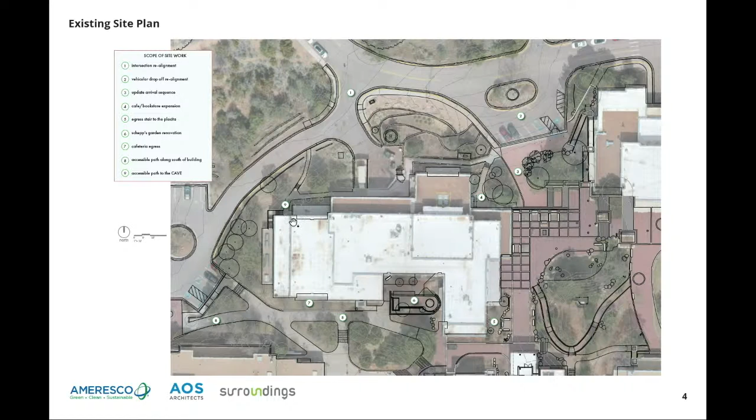That'll happen before the National Register nomination. A lot of accessibility improvements have been made. You all are familiar with that part of the city. It's very hilly, so accessibility is a really important thing we need to do. We're adding a stair here, I'll talk about that in a minute. There's a garden here on the south side that wasn't built until the 1990s. It is not accessible - I don't know how that happened, because ADA was certainly in effect at that time. And then all of these walkways here are inaccessible. We will be making some accessibility improvements in the landscape to this part, to this door, which is a room called The Cave, which is kind of an undergraduate hangout space.

And yeah, so here this says existing site plan - that was a mistake, I apologize. This is a proposed site plan. This is, again, very preliminary. I just wanted to point a few things out to you this evening.

Here we see the reconfiguration of the roads. The red lines indicate where the current curb cuts are. We're going to be lowering a portion of this drive about 16 inches in order to achieve accessibility. And we'd like to reconfigure this staircase up into the campus so that it points to the entrance, so that people know where the entrance to the campus is.

We are proposing a bookstore addition here that I'll talk about in a little bit. This is the stair. Here is the reconfigured garden that will provide accessibility and maintain the place as an outdoor classroom.

We do need to make a series of small modifications to the landscape and the building. I'm not going to go into it tonight because I know we're going to come back, but there's a series of funny life safety egress things that we need to resolve. So this is actually a new stair that we need to add. It really won't impact the aesthetics of the building, but we'll be telling you more about that later. A new series of handicap accessible ramps here, providing access to that cave.

Importantly, what we haven't yet explored but are looking into now is this number 10 here - we are adding air conditioning to the building. It is currently not air conditioned, and the college is doing more and more summer programming. The building is really far too hot in the summer to do that, so we do need to add air conditioning. We do not want to put a ginormous chiller on the roof, but we have to put it somewhere. We've done a fair bit of analysis, and this is the best location that we can come up with.

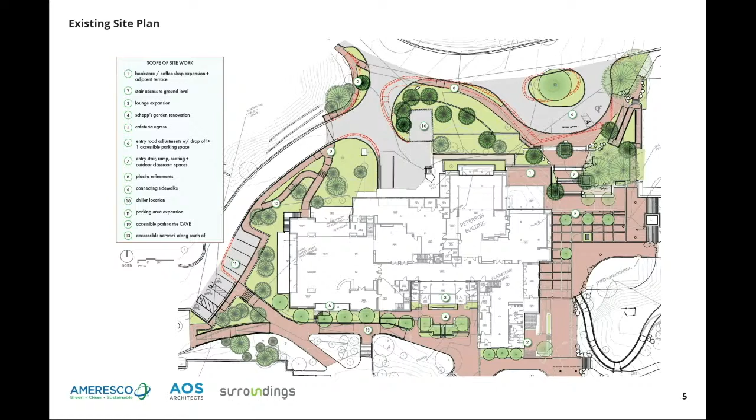Tonight I really want to focus on the buildings. I'm going to skip through some of these plans. We can come back to them if there's need. This is the existing first floor plan.

I wanted to jump to this to talk about some of the interior features of the first floor. I've recognized that you have no jurisdiction of the interior. We're in a bit of a pinch here because we're really trying to conserve and preserve a highly significant interior by Alexander Girard. In the National Register nomination, it specifically says this building is significant because of its interior and because of the work of Alexander Girard. So we're trying to accommodate the necessary programmatic changes, preserve the Girard interior, and resolve critical life safety issues, as I mentioned. So let me point out a few things.

This blue line, where's my cursor? Here's the Girard mural. It's 140 feet long down the main corridor. We see bits of it here in this photograph. It's a magnificent work of art.

And there are painted doors I referenced before. You see this red photograph here. This really playful, wonderful, many, many colors throughout the building. We're working with Stephen Prinz, renowned local mural conservator, who will be working on the mural and the doors.

Inside the building, between the bookstore and the coffee shop, we keep calling it the Wiggly Wall, but it's this kind of stepped wall that's indicated in pink here in this drawing. We see this photograph - I apologize how small the images are - but it's this kind of stepped wall with chalkboards, really important part of Girard's legacy in the building.

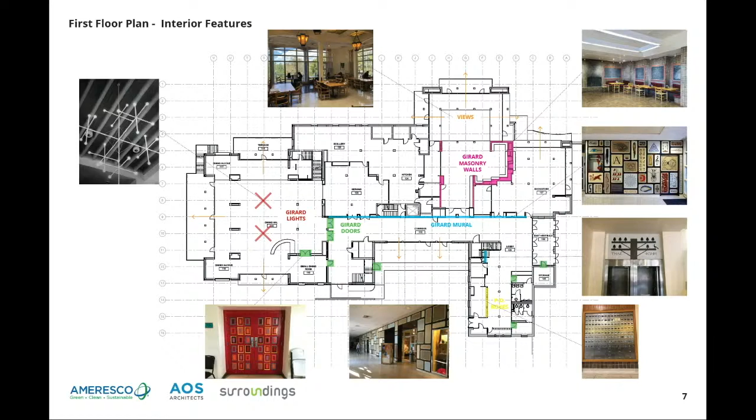And so that's part of why we've kind of ended up towards this addition. I'll talk more about it. We're also looking at the incredible views out of the building, and from various places, and trying to balance preservation of the building with life safety, which has to trump everything that we do, and then the programmatic needs.

The first floor proposed - this is preliminary. As we mentioned, we're looking at 3 additions that are shown in with these red outlines. I'll talk about the bookstore addition first.

As I mentioned, we're really aiming to - I think it's really important to hang on to this really curious wiggly wall. Can I just close all this stuff out? So what we've come up with as a solution is to create a 775 square foot plus or minus addition here that represents about a 40% growth of the bookstore, which will make it economically resilient.

Right now they're really struggling to break even in the bookstore. They really need that extra space. By doing that, we're able to then create an opening between the coffee shop and the bookstore here, and we're going to penetrate this wall here. We're working on the designs of that, but that is really allowing us to preserve this key aspect of the Girard interior.

The second addition is what we're calling the East Entry addition. This will make much more sense when I show you the second floor plan, so I'm going to postpone that discussion. The third addition we're calling the South Court addition, and serves a number of purposes.

Interestingly enough, the Student Center has no lounge space. There's no comfortable space for students to relax and talk with each other about their days and everything that's going on. There are lounges on the campus, but they're all in the dormitories.

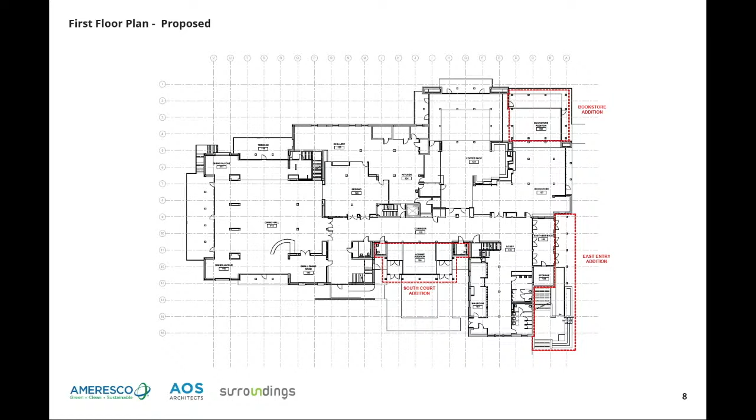We are sprinklering the building as part of our upgrade, but that doesn't buy us enough extra leniency in terms of the additions. The other thing to take note of with this stair is that there are a series on the north side of very large terraces, which provide space for these large meeting rooms in the Great Hall. Those terraces also do not have appropriate egress, so we're connecting them all and linking them through to this slight expansion of the east terrace, and then that will access this stair. Again, that will make more sense in 3 dimensions.

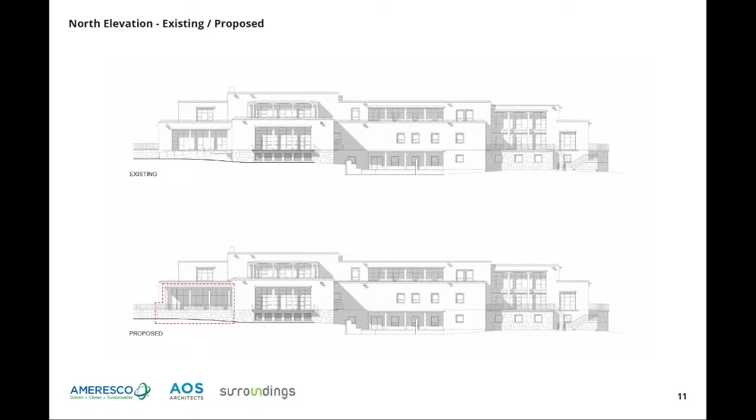Trying to go quick—we've included the existing and proposed elevations for each facade, and we are not changing the proportion of stucco to glass on the building. We are simply moving glass out away from the building to preserve views and provide these programmatic expansions. So when you look at the existing versus proposed, they don't look all that different, and we think that's a good thing. That helps us meet the Santa Fe Design Code as well.

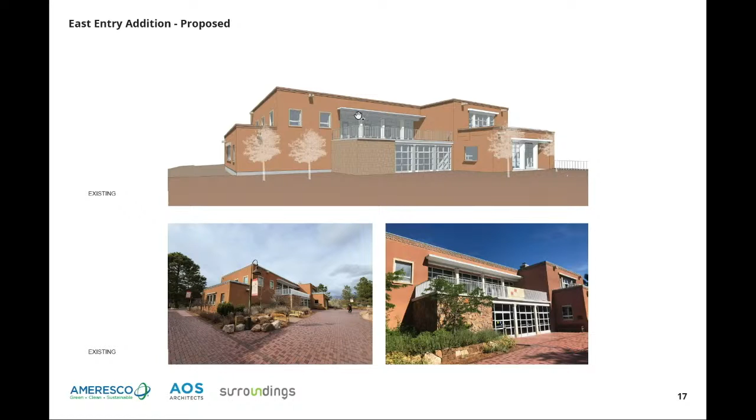Here we see some more recent photographs, early 2000s, where this portion of the building really wasn't experienced from the main plaza. We can see here this earthwork happening and the connection that was removed that has caused this life safety problem. Here we have our early computer model on the top, and you can see now this landscape is all at one level, whereas before it was tiered. We have a lot of people that need to egress off of this deck that we need to get safely out of the building.

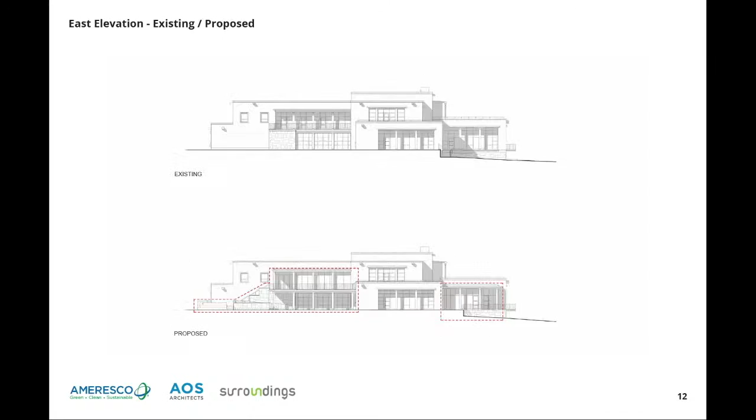One of the first things that we did—we also have an accessibility challenge that I forgot to go through in the plans. Given that the building was built in 1964, and obviously ADA was enacted in 1990, there is a plywood ramp that's really hastily constructed here. There's about a 2-foot difference between this portion of the building and this portion of the building. That ramp is too steep, it doesn't meet ADA, it looks terrible, and it's an intrusion into this remarkable historic interior.

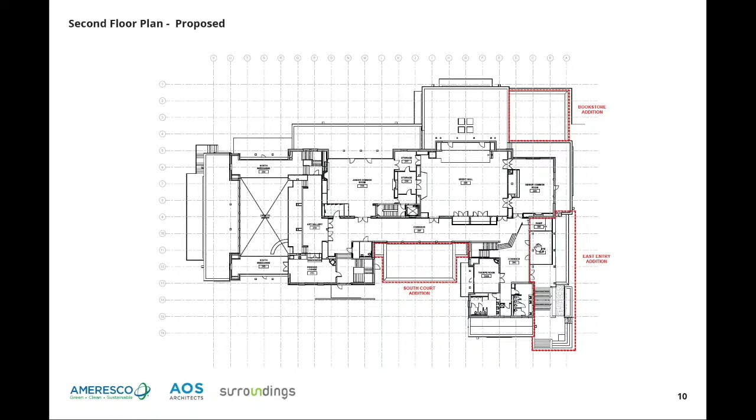So what we're proposing to do is actually take that ramp and move it outside onto the terrace. So there's a ramp here, and there's a small lounge addition here as well, built onto the existing deck. That'll make more sense in the three-dimensional.

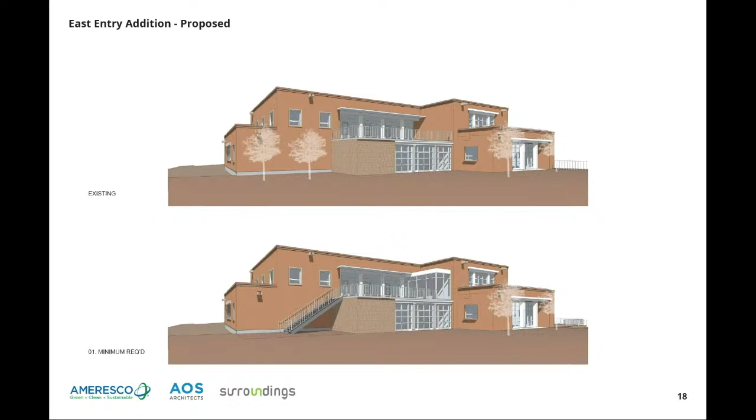At a minimum, what we need to do is add a stair from grade up onto this masonry cube, this stone construction, and we need a ramp addition. In my mind, these are both kind of carbuncles. We've got a really extraordinary historic building, and we're trying to add on to it, solve life safety problems, while not taking away from the building. In my mind, these absolutely do that.

We did have a cursory courtesy review with the State Historic Preservation Office last week, and they've given us some really wonderful feedback. Their concern is about the monumentality of this, and they would really like us to diffuse the prominence of the second floor portal, which is set back.

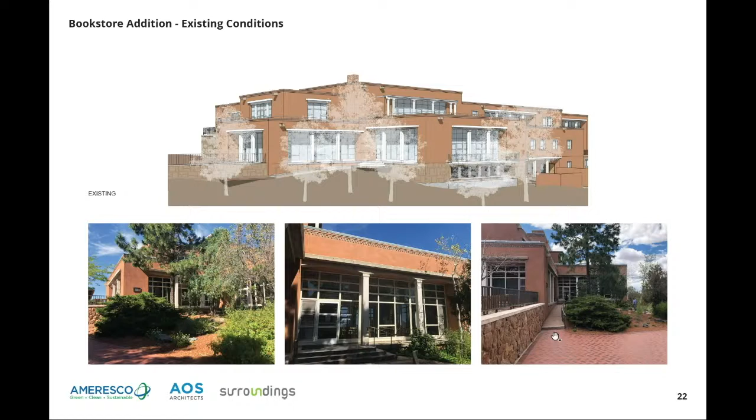Here's the existing view of where the bookstore addition is happening, and we have these kind of wispy trees we're looking through because the campus is highly vegetated. So these additions, seen here in computer drawings, will largely be screened by vegetation. Here are some existing views - there's curious ramps with steps, and we're trying to improve accessibility.

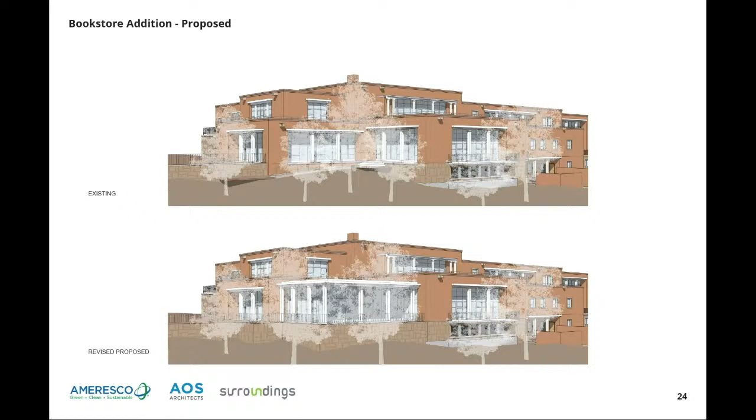The last addition is the South Court addition. Here we have this very broad south-facing glass wall with no protection from the sun. At times of the year, particularly in the winter, we get a lot of direct light through that glass onto the mural.

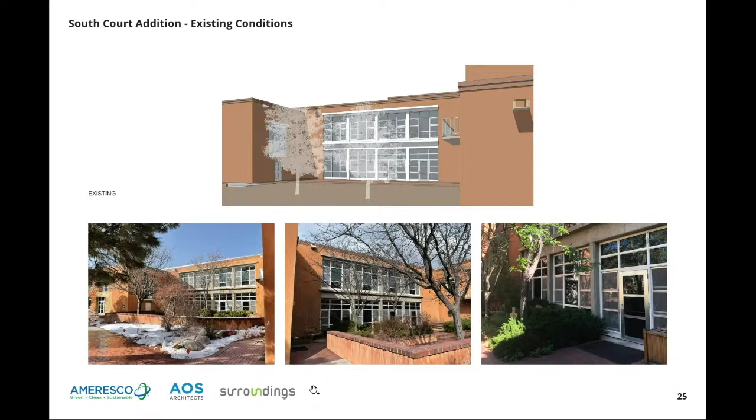So that is what we're hoping to do, and I hope I've explained the necessity of this. I'm happy to receive your feedback and hear your thoughts.

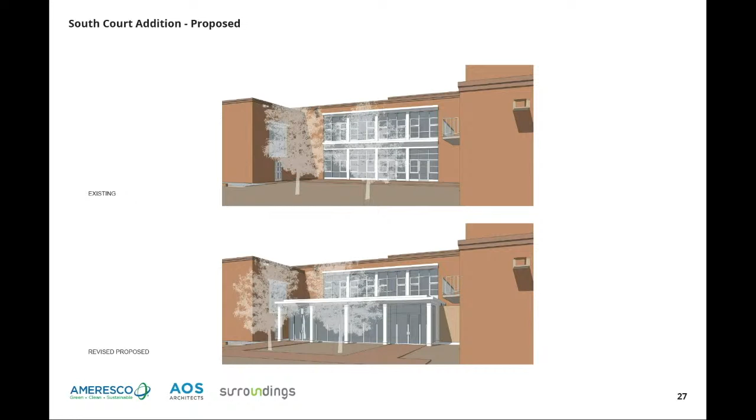What I think we need to do is take one elevation at a time, so the board can thoroughly look at it and digest what is happening in each, and then we will give our comments. The elevations you are making changes to are the north, south, and east. We'll start with whichever one you'd like - let's start with the east.

What is the total square footage that you are adding with the stair? The building right now consists of 45,000 plus square feet, and you are proposing - the bookstore is about 775 square feet, this east entrance is about 422 square feet, and these are enclosed heated areas. This is all in the memo that's in your packet. The South Court addition is 990 square feet.

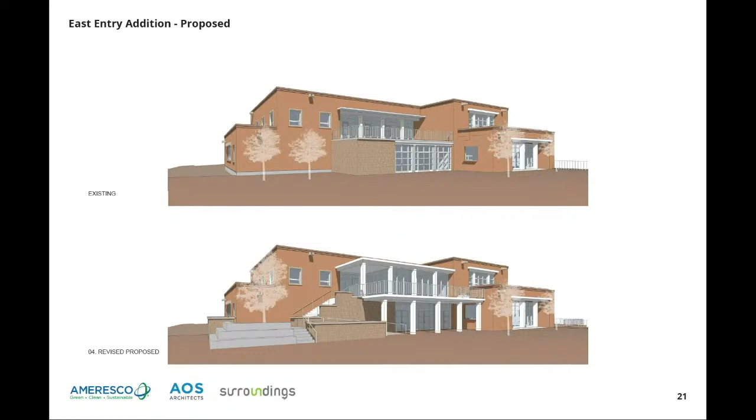Yes, Heather. Thank you, Chair Rios. I would just like to point out that the Historic Districts Review Board actually visited the site today as part of their typical field trip, so we got the opportunity to walk around not only the exterior, but also the interior.

Wonderful, thank you for letting me know that. So, board members? Yes, Member Larson.

Yeah, so I am really appreciative of your presentation, thank you so much. I'm really happy that we have robust documentation for this property, and it helps us make our decisions as well.

And clearly you've put a lot of thought into this building, which we may not have seen 10, 15, 20 years ago. This might have just been dismissed as insignificant architecturally. So it's really nice to see it being honored by the proposed additions, and also really enlightening to see the consideration that the exterior is giving to the interior.

Which, of course, is contributing to its association with Alexander Girard and his design. I really appreciate that we're thinking holistically about the property, so I think we should all consider that in our feedback as well, with the need to protect the interior and enhance it.

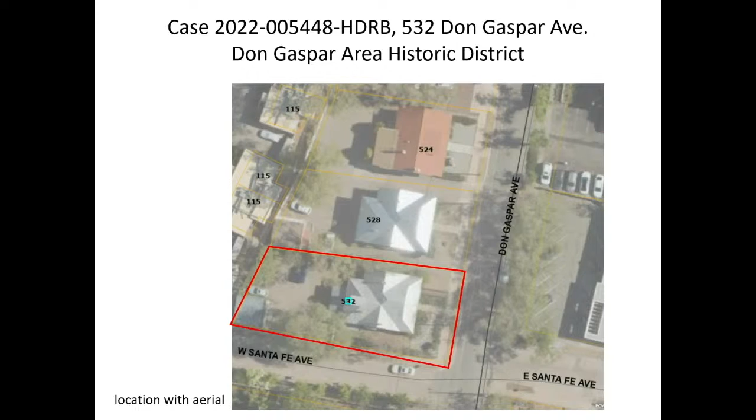For the new board members, I think this is the first time they'll be seeing this tonight. In the past, we have seen this come forward for a status review earlier this year, and then recently, about a month ago, the board asked for changes and more detail. So tonight I'll do a quick review of the plans and the building itself. Just a little background: we are looking at the twin, as we like to call it, 532 Don Gaspar.

So we are in the Don Gaspar Area Historic District, looking at the Craftsman Bungalow that's been listed. It was originally listed as contributing to the downtown and east side. The board reviewed it to do a status review and designate it as significant earlier this year. It was built in 1928 as Tyler's Drugstore, so it was used not as a residence but as a commercial building.

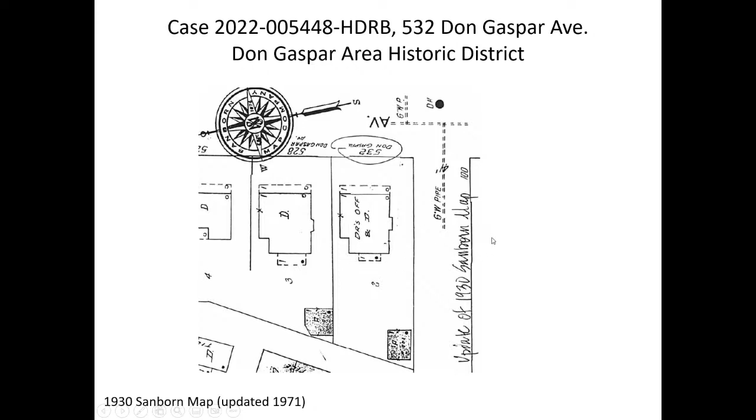That ramp will be removed as part of this application.

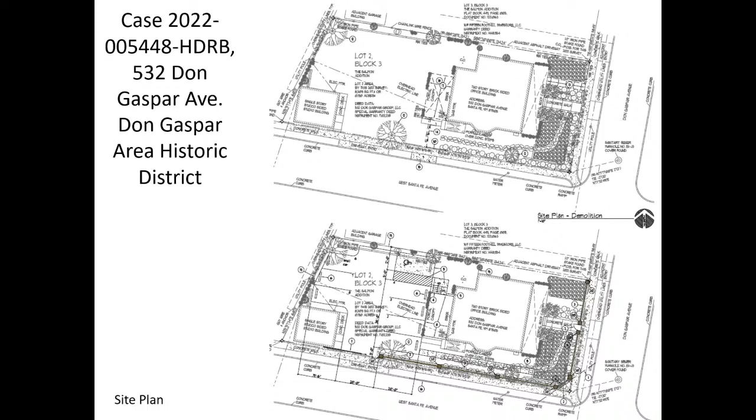I'm going to direct your attention to the site plans where there is the addition of a yard wall. That wasn't very clearly shown in the last hearing we saw this come forward, but you'll see it starts in the northeast corner and wraps around to where the parking stalls end. So part of this proposal is a yard wall. The twin does not have one, and this is a stucco yard wall with brick detailing, brick pilasters, and a wrought iron gate. It is about 4 feet tall.

Let's get through these. On the north facade, we are also seeing the change of windows - all the non-historic windows will be replaced. There was a window assessment, and the exception was removed from this case because the proposal is to replace all of the damaged windows that are considered beyond repair. So once we are looking at beyond repair, they are not looking at replacing any that are within repair, so there's no exception applied for that.

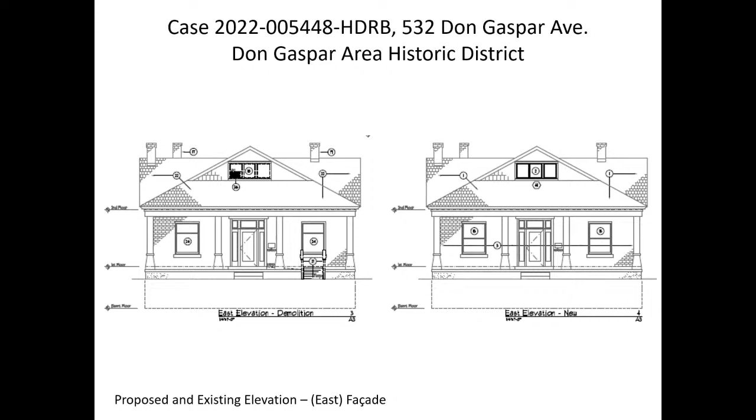So you can see in the dashed lines which windows are going to be replaced. That ADA access ramp will be removed, and there will be a lift added in the back. From the last time we saw this case, there have been some slight updates and changes based on the details that we were really looking for, or rather the board was looking for.

So this is the back porch detail, and this did require an exception. We believe staff recommends that all the exception criteria were met, but you may require some further testimony rather.

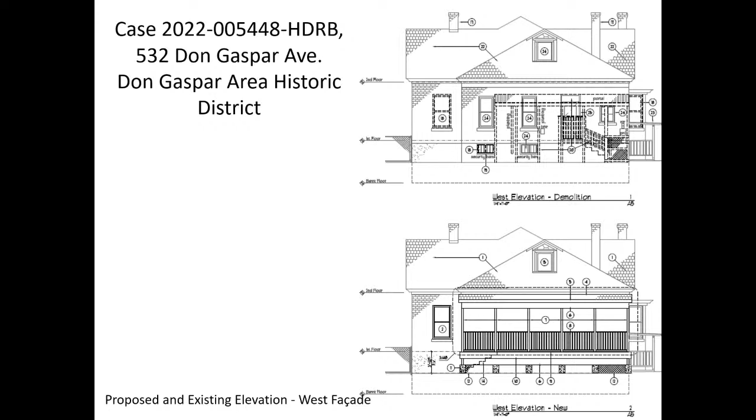One of the board's comments last time was to space these vertical posts, these columns, out a little further because they were very tight and did not fit the building's proportionality very well. Another comment was to come back and add details so it can be further examined what this back porch is really going to look like. That has been added - there's been an increase of about 6 inches of the overhang of the porch and post, and it's been pulled back a little bit more in with the house.

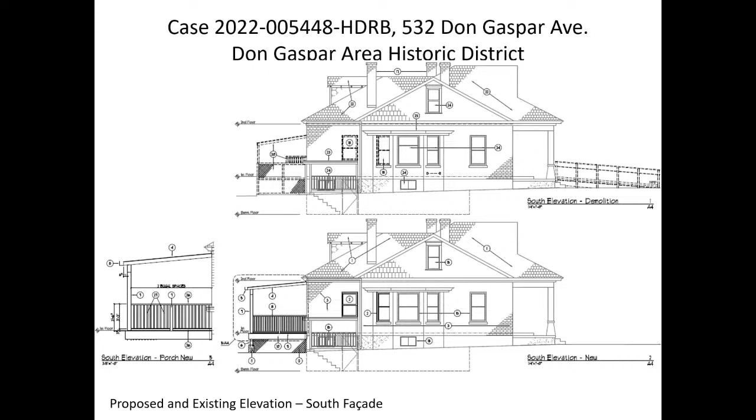Now all of the railings are wood and to be painted. We also have details for the replacement of the roof. The roof has been found to be pretty heavily damaged, roof decking rotted - you'll see that in your packet.

Here's a blow-up of the details that we're looking at tonight. I still have an added condition on this one, just that the wrought iron remain the color of wrought iron, not to be painted to match the stucco.

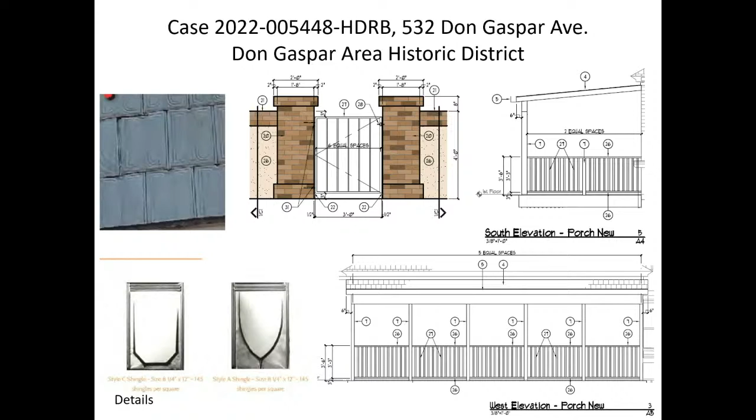Thank you, Carly. Any clarification questions for Carly at this time? Member Beachley: Could you please remind us, is the exception requested for the replacement of the porch, but not for the roof?

Not for the roof. So whenever we are replacing materials, the way the code reads is that replacement of historic materials that are repairable requires assessments from someone who can go look at the windows and give a really good assessment of the dry rot we're going to see. Same thing with the roof. That's why they're coming back. If it's repairable, we go as tightly in kind as we possibly can. Now, if it's not in kind, that's when an exception is requested.

Is this considered in kind, in your opinion? I think this is as close as we can find from any manufacturer at this point. So if there's none on the market that we can really get, this meets that definition. Thank you. Any other questions at this time?

If not, will the applicant or applicants come forward and get sworn in? You swear under penalty of perjury that the testimony you're about to give is the truth, the whole truth, and nothing but the truth? Thank you. Please state your name and address for the record.

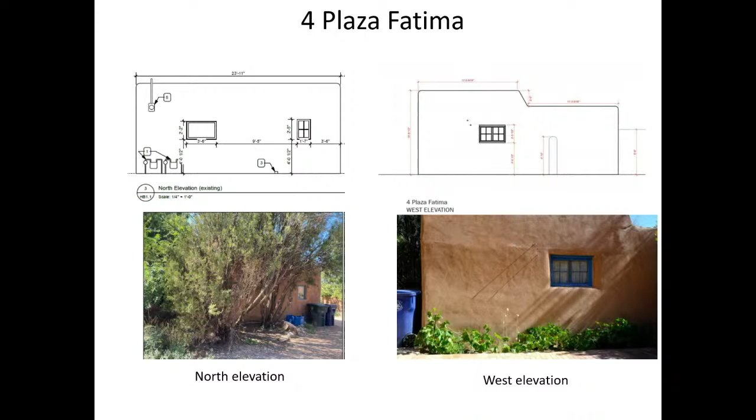The house's entrance features a multi-light French door behind a decorative wood screen. The front door opening extends to a front 4-panel wood casement within the same opening.

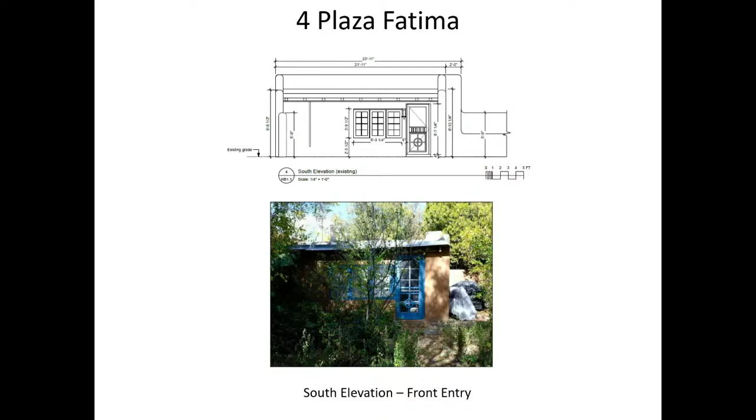There have been no major exterior alterations to the building. It has remained unchanged since the 1950s when the current owners bought it. The south elevation's combined window and door, and the east elevation's single 4-panel multi-light wood casements, which are behind the tree on the lower right photograph, help to define the simple vernacular character of the house.

The 6 foot stucco yard wall, shown in the lower left photograph, extends across the east elevation and closes the backyard courtyard. The wall is believed to have been constructed after 1984, which is when the Historic Building Survey was written. At 6 feet, it is highly unlikely that it was built before 1972 or '73.

Other yard walls of varying heights in the plaza compound were added since the 1980s, based on surveys of the other 4 casitas in the Plaza Fatima compound. The applicant requests historic status review and primary facade designation as applicable.

Staff recommends the historic status of the structure be maintained as contributing per 14-5.2C, designation of significant and contributing structures, and that the east and south facades, respectively 1 and 2, be designated primary facades. Staff recommends that the yard wall be designated non-contributing based on its tall height and age. And that concludes my report. I stand for questions.

He's already been sworn in. Oh, thank you. And I will indicate that we cannot discuss possible future plans. We are simply wanting, this is a designation, a historic designation and primary facades.

And, yes, sir. We are, I heard what you said, Madam Chair, and I won't delve into details. The intent of this renovation that we'll be proposing, that you'll be hearing in the future, is not to change the massing or the area of the building. It's to breathe new life into it, to make it more livable. It's essentially falling apart. There's vines growing through the inside of it.

Some of the windows, we love this old building. Our client loves it. His family's owned it since the 1950s. They intend to continue to use it. We want to make it more functional. Our intention is not to change it in any significant way.

We've been led to believe, and there's been communication, that the owner, prior to engaging us, did have a meeting with David Rasch related to a designation. David had indicated that the portions of the building facing the public way, primarily the north facade, was the contributing facade. The entire development is one of those wonderful schemes in Santa Fe where there's public access, there's a driveway, and then everyone's private spaces are in the back, and there's a public face to the building. I'm adding this not to contest anything that Angela's presenting, just to present some of the history related to this project with the owner.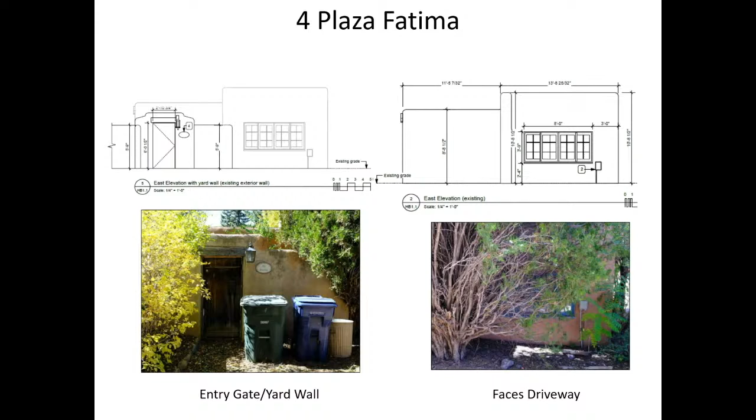There's no information on the exact date, so would you accept the possibility, or the probability, that the wall is in fact historic and could be designated contributing? Yes, I do, in absence of definitive history on it.

I'll make a motion. In case 2022-005792, HDRB for Plaza Fatima, based on staff's report and the information presented today in the record, I would move that the building's status be maintained as contributing, and that the east and south facades 1 and 2 be designated primary, and that the yard wall be designated contributing as well.

We hear a second. Aguilar Medrano seconds. Anything further?

Roll call vote, please. Member Aguilar Medrano? Yes. Member Berkeley? Yes. Member Biedscheid? Yes. Member Bienvenu? Yes. Member Larson? Yes. The motion has been approved.

Thank you very much, sir. And we move on to the next case, located at 906.5 Don Miguel Place. May we hear that report, please? Yes, and that's yours too, Angela.

Thank you, Chair. This is case number 2022-005793, a remodel and addition proposed at 906.5 Don Miguel Place. The place is off of Camino Don Miguel.

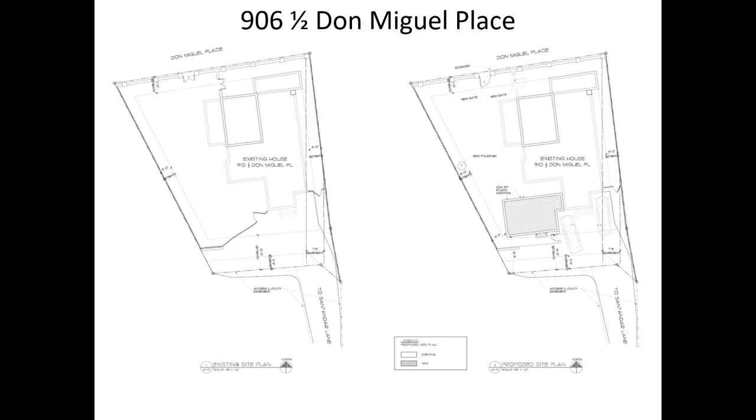So this is the site plan, existing and proposed. This house is a single-family residence constructed in 1951, designated non-contributing to the downtown and east side historic district. The house is single-story, flat-roofed, with parapets in the Spanish Pueblo Revival style.

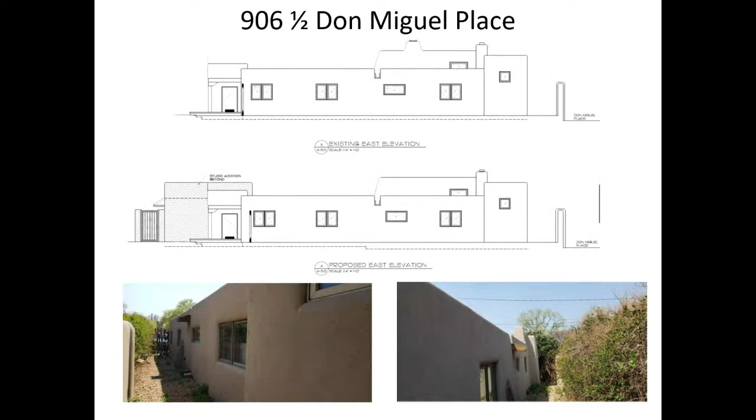It was extensively remodeled in the 1970s, when all the windows and doors were replaced and clerestory windows were added. You can see the clerestory windows in the existing south elevation at the top of this slide. An addition was added in 1998. The residents access the front door from Santander Lane.

No, it is Santander, not V Hill, which we discussed on a field trip today—to correct that. The applicant proposes to add a 404 square foot studio to the southwest elevation at the same height as the house, which is 13 feet 6 inches.

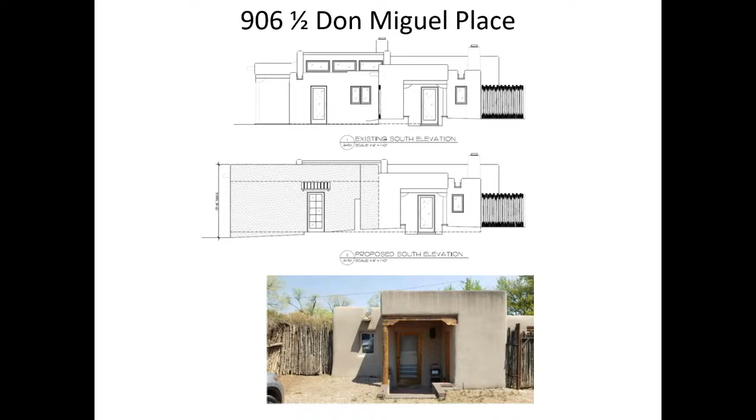The south elevation will have a 2x5 light French door and a small 10x10 overhang with a metal roof, burnished slate. The west elevation will be 2x3 light. New windows will be aluminum clad wood, and stucco will match the existing, which is buckskin.

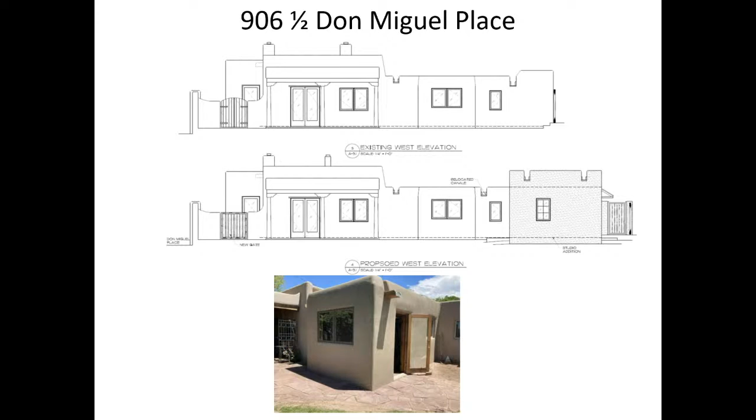The new gate would be rusted metal with a wood frame stained dark brown. The applicant is proposing that to discuss with the board tonight, and it remains part of his proposal.

The applicant also proposes to replace the existing low wooden arched gate on the inner courtyard, behind the same yard wall depicted, on the east side of that wall, with a new gate to match the proposed gate on the north elevation. That gate is within the courtyard, inside, behind the wall.

Approval of the proposed project with the condition that the sliding glass doors are divided light if found to be publicly visible, and finds that the application complies with section 14-5.2D, the general design standards for all historic districts, and 14-5.2E, the downtown and east side design standards.

And with that, I stand for questions. Any questions for Angela, board members? It appears not. Angela, may we have the applicant or applicants get sworn in?

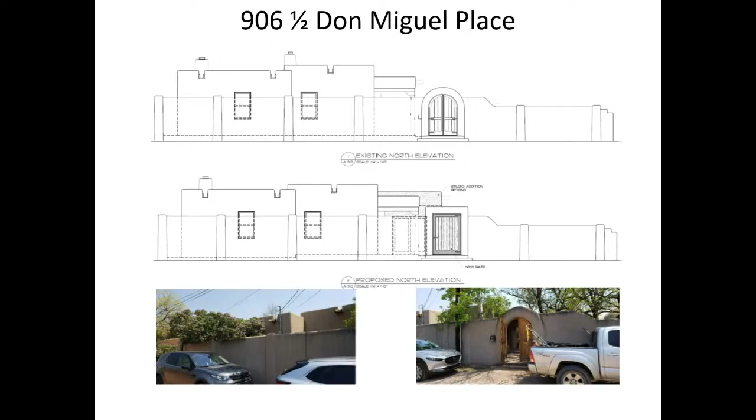You swear under penalty of perjury that the testimony you're about to give is the truth, the whole truth, and nothing but the truth? I will, I do, yes. Thank you. State your name and address for the record.

Richard Martinez, Martinez Architecture Studio, P.O. Box 925, Santa Fe, New Mexico. Hi, Richard. What do you have to tell us about this project?

A couple of things. We don't intend to affect the house in any way. What we'd like to do is add a studio for the owner, who is an artist and has a studio in her house right now. She's owned this house but lives nearby, and she's going to move back into this house, which is very nice. So we're just adding a small, basically 400 square foot addition as a studio for her.

It's so small that the one swinging door has to open out so we can fit all the furniture into the space. And the sliding glass door doesn't have any dividers because the windows and doors on the house don't have any dividers. I was trying to not make it stand out in that little courtyard. But otherwise, the doors and windows on the outside of the studio do have dividers because they don't face in and they're more publicly visible.

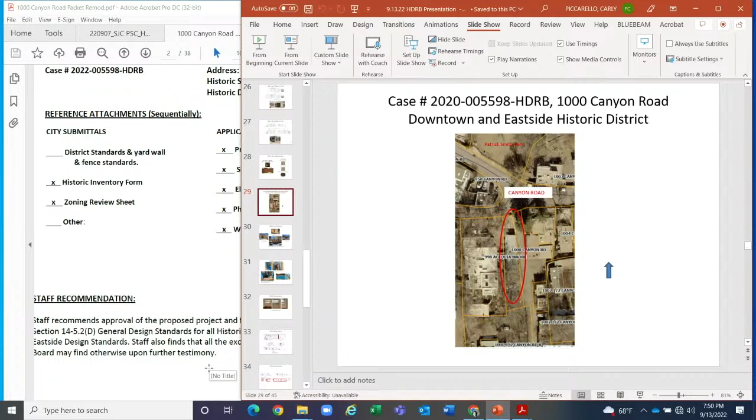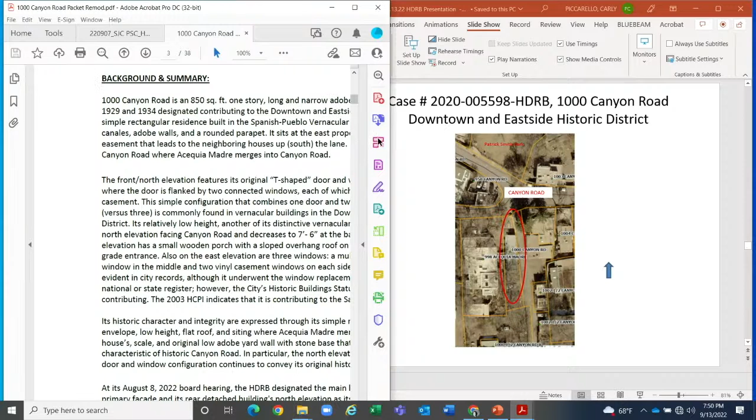1000 Canyon Road is an 850 square foot, one-story, long and narrow adobe structure built between 1929 and 1934, which is designated contributing to the downtown and the East Side Historic District. It's a simple rectangular residence built in the Spanish Pueblo vernacular style with a flat roof, metal canales, and adobe walls with a rounded parapet.

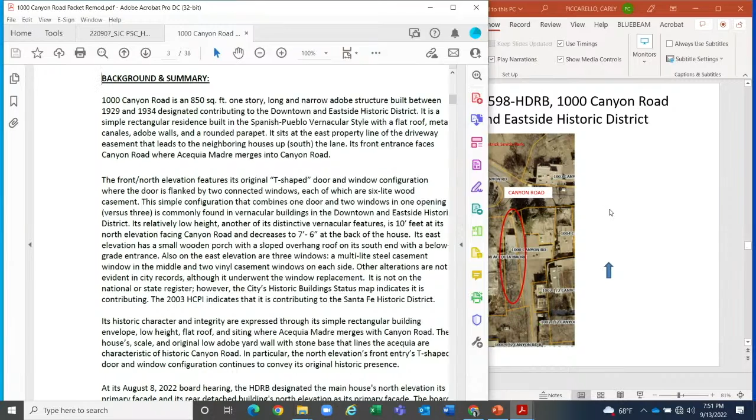It sits at the east property line of the driveway easement that leads to the neighboring houses, which are south of the lane. Its front entrance faces Canyon Road, where Acequia Madre merges into Canyon Road. So I want to show you on the slides four elevations and a photo of the house.

The front, the north elevation, features its original T-shaped door and window configuration, where the door is flanked by two connected windows, each of which are 6-light wood casements. This simple configuration that combines one door and two windows in one opening versus 3 is common in vernacular buildings in the downtown and east side historic district.

The house is relatively low height. Another of its distinctive vernacular features is 10 feet at its north-facing elevation, and decreases to 7 feet 6 inches at the back of the house. So this is actually the short end of the house towards the south.

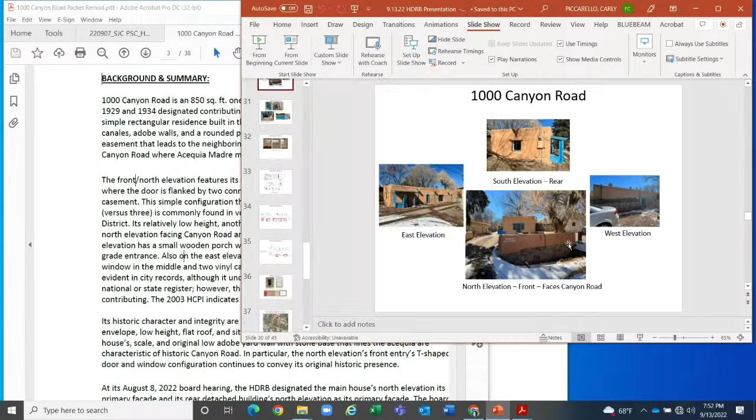Back to this photograph, this is the east elevation and shows this sunken-in porch below grade and these 3 windows referred to. These are non-historic vinyl windows. This center window is a steel casement. Other alterations are not evident in city records, though it underwent the window replacement.

It's not on the National or State Register. However, the city's historic building status map indicates it's contributing, and the 2003 HCPI indicates that it's contributing to the Santa Fe Historic District.

Its historic character and integrity are expressed through its simple rectangular building envelope, low height, flat roof, and siting where Acequia Madre merges with Canyon Road. The house's scale, an original low adobe wall with stone base that lines the acequia, are characteristic of historic Canyon Road. In particular, the north elevation's front entry T-shaped door and window configuration continues to convey its original historic presence.

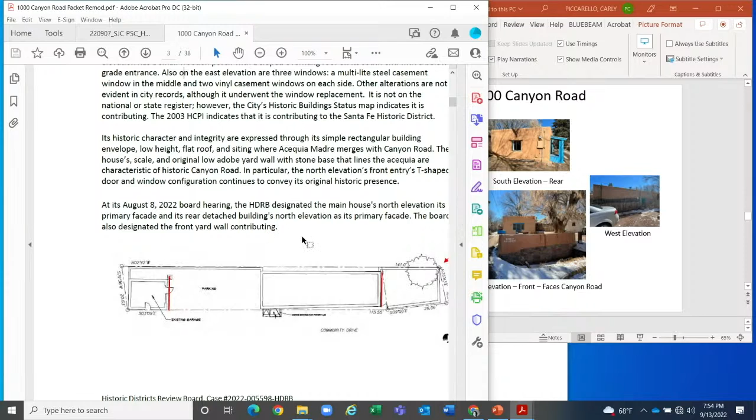As I stated in an earlier board meeting, the board designated the main house's north elevation as its primary facade, and the rear building's north elevation as also primary. The board at that meeting also designated the front yard wall contributing.

The current proposal the applicant has brought before you is to replace the front window and doors on the north elevation. The current door is wood with glazing and is flanked by windows on each side, and the applicant proposes to replace both with a new door and windows in the existing openings to match existing materials and design in kind. The applicant has provided a window and door assessment that recommends replacement because the existing are beyond repair, with rotting jambs and wood frames that are structurally unsound.

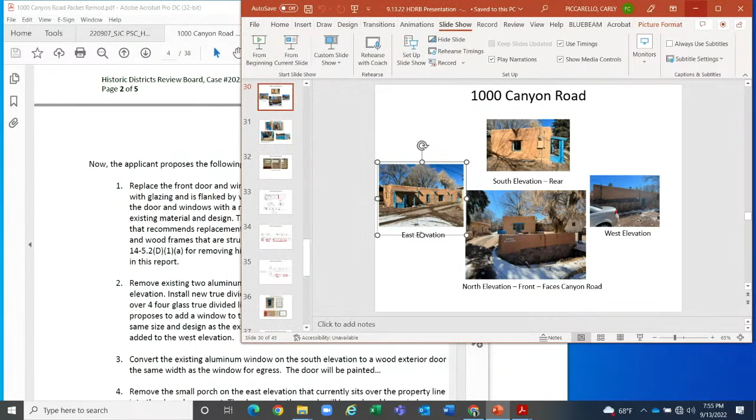The applicant requests an exception to Section 14-5.2D, Number 1, little a, for removing historic material. Exception criteria responses are included in this report. I'm going to show you the photographs of those windows and doors.

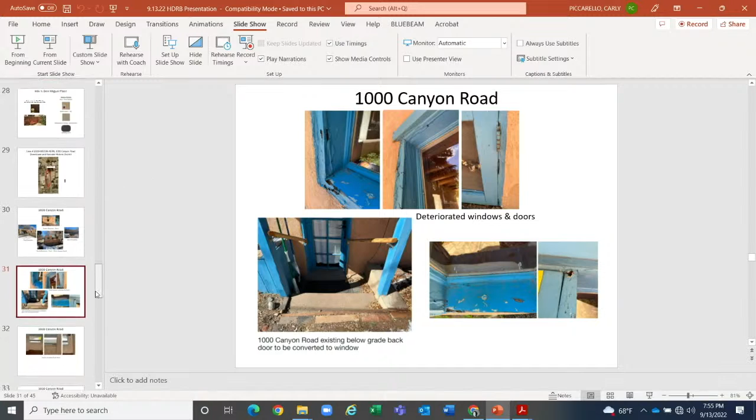This is the current condition of the rear below-grade porch, which is one of the proposed changes from a door to a window. These are the deteriorated windows and doors the applicant's proposing to replace. This is the front door from the inside, which shows that it is, according to the assessment, and I agree, unrepairable and warrants replacement.

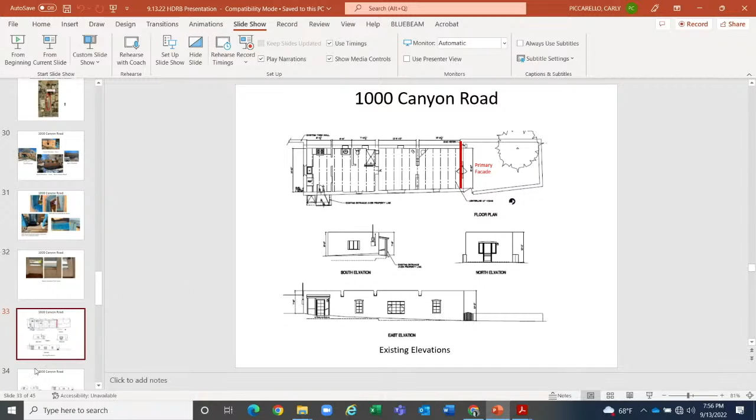Just to show you through the elevations, these are the existing elevations. They're a little hard to see, but the existing match the photographs I just showed you. At the bottom, you'll see those three existing windows. The proposed changes are to add these windows.

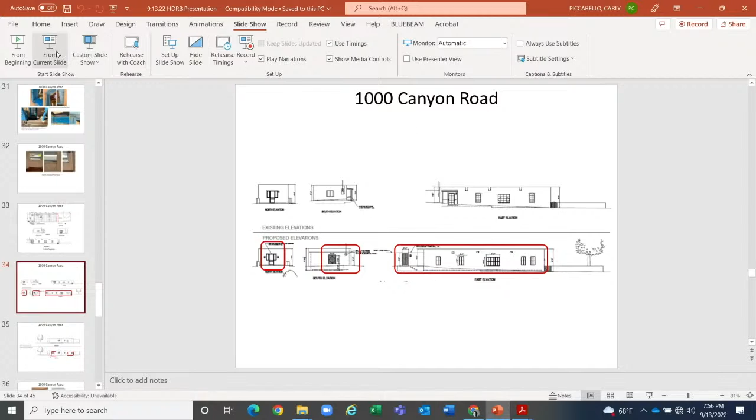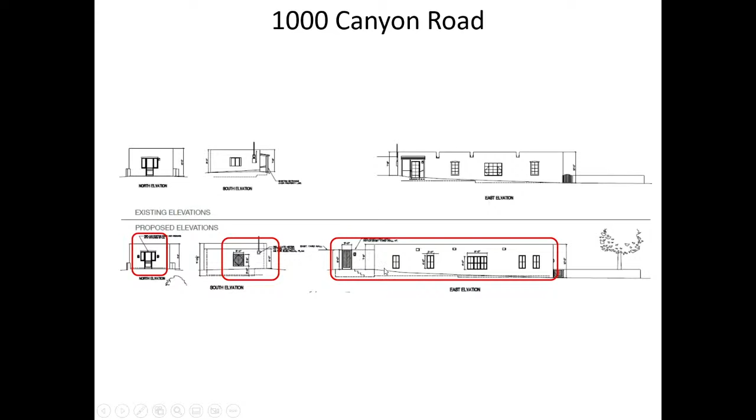On the west elevation, the proposal is to add two windows and an additional window at the back, south side.

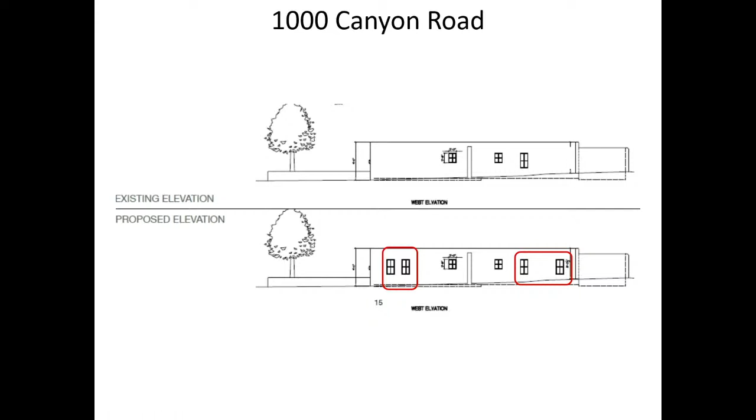Let's see. Let me go back to my staff report and my recommendation.

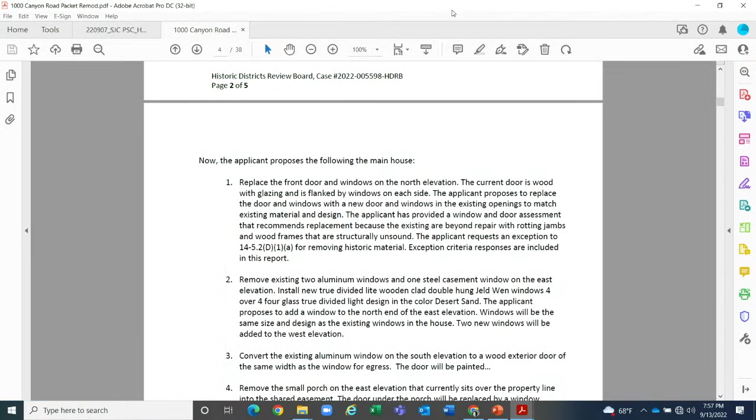Adding new outdoor lighting on the south elevation, it consists of two Mexican tin and glass lanterns from Artesanos, which he refers to as the Gorro fixture, on each side of the door and windows, and to re-stucco the entire building with cementitious buckskin by El Rey. The applicant also proposes to add a patio wall at the rear south elevation to match the height of the existing garden wall in the back, enclosing a 12 by 17 foot garden space. The wall will have locally made wooden gates with window shutters and a Mexican tin and glass light at the gate entry. No changes are proposed for the garage building.

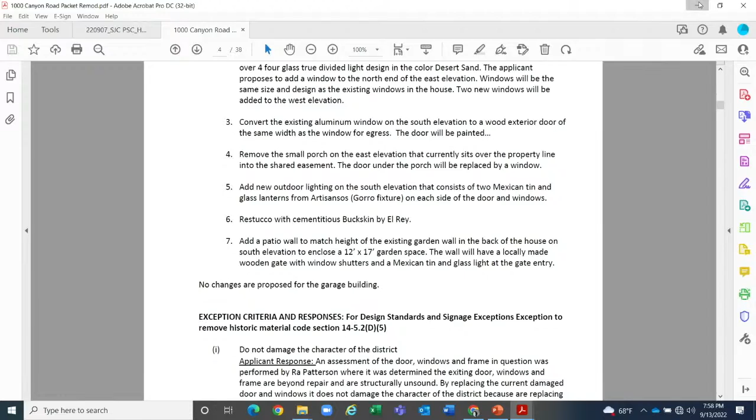I'll go back to show you through the rest of the slides.

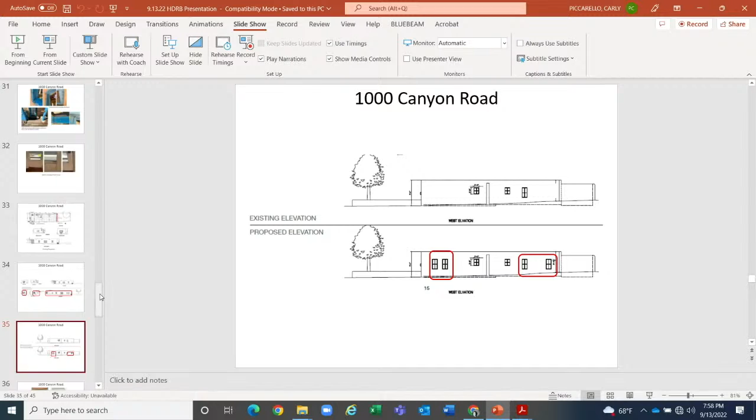This is the existing window, which is actually a vinyl window. This is the proposed design, the color scheme, the proposed lighting, the stucco, and window types.

And with that, staff recommends approval of the proposed design, finding that the applicant has met all the criteria. The board may find otherwise, but staff does recommend approval of the proposal consistent with the general design standards for all H districts and the downtown and east side historic design standards.

Thank you, Angela. Angela, will the new windows have that framing surround as shown on the left-hand side, the pediment that we're looking at on that? I believe so, I believe those are being replaced, but I think that needs clarification here today. Okay, well, I'll ask the applicant.

Okay, any other questions? Member Biedscheid? Was the wall height, allowable wall height calculation performed for this property? For the rear property, no, because the patio wall is, I believe, 4 feet, and it's not going any higher than that, and it's 20 feet within that property. It's off the property line, so they can go higher when they're 20 feet back from the property line.

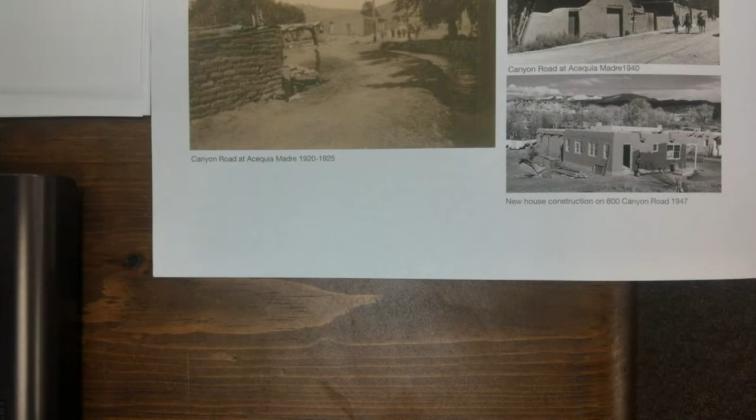And then this photo here is a building that was under construction in 1947 at 600 Canyon Road, showing the sort of simplicity and very humble architectural details that went into those sorts of houses in that area.

I think sometimes it's better to read some of these simpler designs if we're looking at the massing with just punctures, because that's really the two things that make up this small house: the solution to the punctures, keeping them simple and straightforward, and making them all consistent.

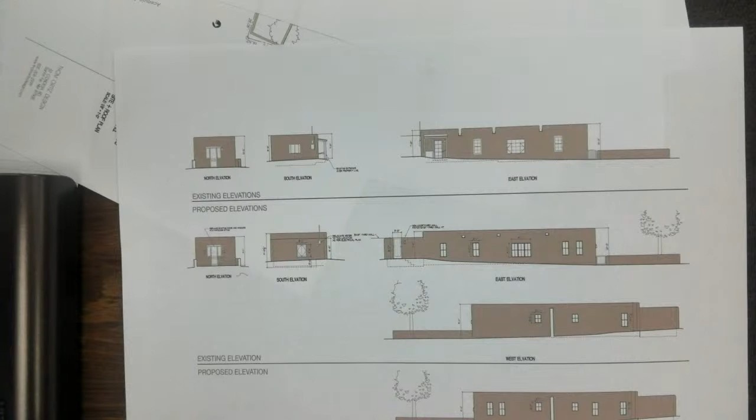So all of the new windows, there's basically three different size windows throughout the house. They are the exact same size as the windows that are there, with the exception of the metal window, which is no longer operable. We're replacing that with also a wood window with an aluminum powder-coated exterior, wood interior, with true divided lights, and it's paintable on the inside.

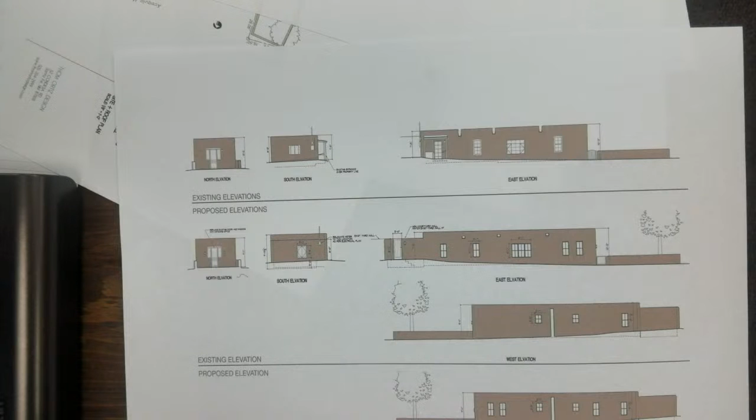In terms of, I think Angela had mentioned it, we're maintaining the elevation of that front door with the two small windows on the side, sort of a T-shape. We'll be having that produced by a local door manufacturer. It'll be made out of wood, wood on the outside as well as the inside, painted to match all the other additional windows that we're recommending. I think that's it.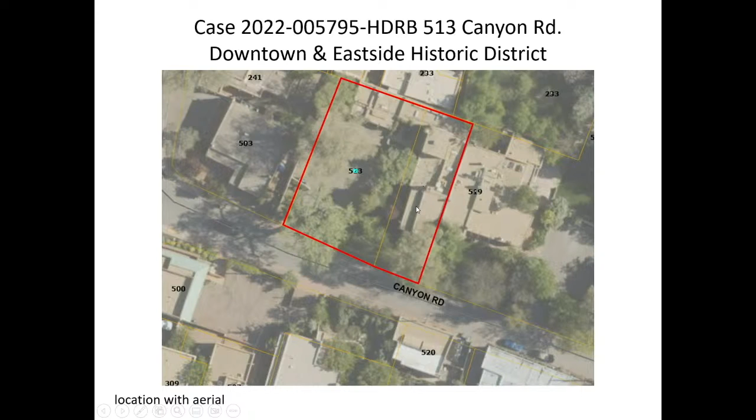This is, the building is in an L shape. It is Spanish Pueblo Revival style, and we're looking at the south end here.

The building grew pre-1912. It could be as early as 1880, according to historians' information included in the packet. So you're looking at the oldest portion here. And as you go north and west on the building, the building gets a little newer and newer, until we get to the 1950s, inclusive of the second-story addition.

Now, the only really substantial changes happen right around 1984 when Morningstar Gallery becomes the owner, and the chimney and the mechanical room get added. There was a remodel done at that time. Yard walls were added. And so as you can see, we go west, and here is this western addition. The vigas on this portion don't go all the way through—they're only on the exterior there, unlike the rest of the building.

So here's a little, some of the aerials. What we're looking at here is the 1912 King's map. This little piece of the building is the southernmost portion of the L shape. And as we talked about, it grew, and then grew over into 1958. We can see that it's a stable building, but it does not have that shadow of the chimney there.

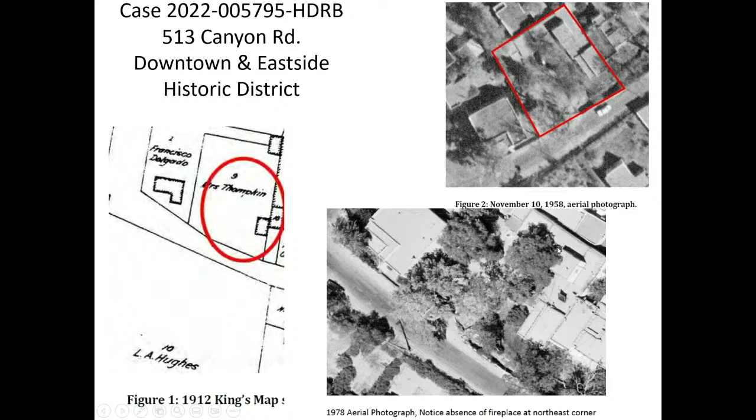You can likely see it much better in the packet than you can here, but you would see that where my cursor is right here, it's not there. And then in this one, you would see a darker shadow. It's a little harder to see on the presentation than in the packet, so if you'd like to refer to your packet for that, that's where you would want to be.

So we are looking at the gallery, the former residence. You'll see protruding viga ends on the upper portion here, and the lower portion here, and they are as well further down. Now this is the kitchen, just west of the former residence, and that has smaller diameter timber viga latillas on the interior. So we expect that to be kind of the older portion of the house, and then that mechanical room is labeled here, and that was added.

So the recommendation is for this outline portion that excludes the mechanical room on the west elevation to be primary. So we're looking also at the south right here, and then the west minus the mechanical room. The river rock walls—I'll speak to the courtyard walls. Courtyard walls were added sometime around 1984. They're relatively newer. The west courtyard wall is as well.

Now, the river rock walls here, and the wall along the streetscape, don't really show up in the aerials, and we don't have a good date on them, but they are indicative of the older walls and are quite a bit different from what was newly added. So the recommendation from staff is for contributing.

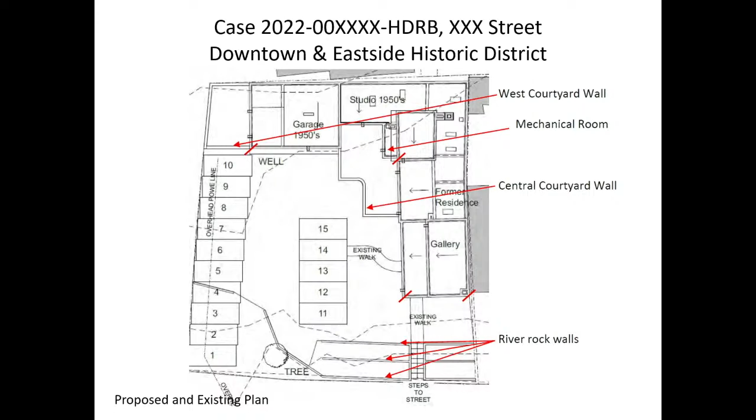Okay, and here are the elevations. I'm just going to speak to the south elevation briefly. These are 1990s windows right here with some snap-in muntins, maybe late 80s, but that's what you're seeing on this elevation. These are the protruding vigas that don't go into the house, so there is some evidence of some sort of remodel that happened that potentially changed that—it looks like it could have been a portal.

We don't really have evidence to see exactly what it was, but that is one of the main reasons we're pushing outside of that zone of what could be primaried here. And then we have this two-story addition here. It is from before 1958 for that two-story addition, but we also have the chimney addition and the mechanical room added onto that portion. And the architectural value that it adds is questionable, and so that is why it is left out of the staff recommendation tonight.

So just to conclude, the staff's recommendation is to maintain the historic status as contributing and to designate the south elevation of the east wing and the west elevation of the east wing, excluding the mechanical room and chimney, designating this as primary.

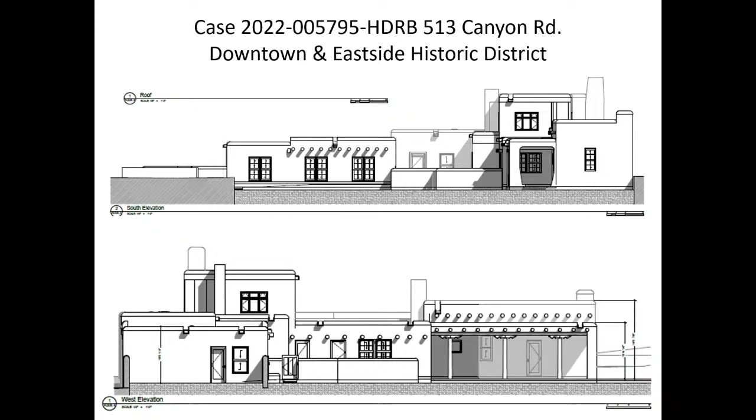Thank you, Carly. Did you also address the three little rock portions? So those are the river rock walls, and I didn't give a number of them. There's actually 3 small retaining walls plus the wall along the streetscape. For clarity, that makes 4, and those should all be included as on the contributing designation.

Thank you, Carly. Any other questions for Carly? None. Gayla?